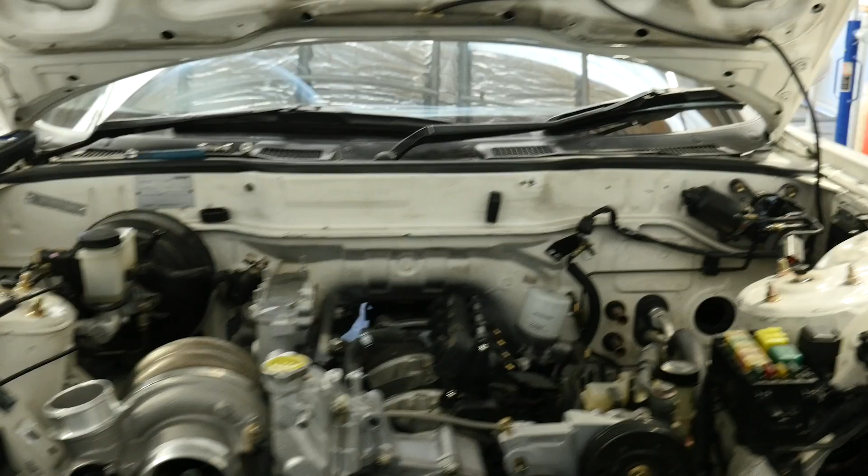Welcome to this webinar. We're going to be looking in a little bit more detail at how a VNT or variable nozzle turbocharger works.

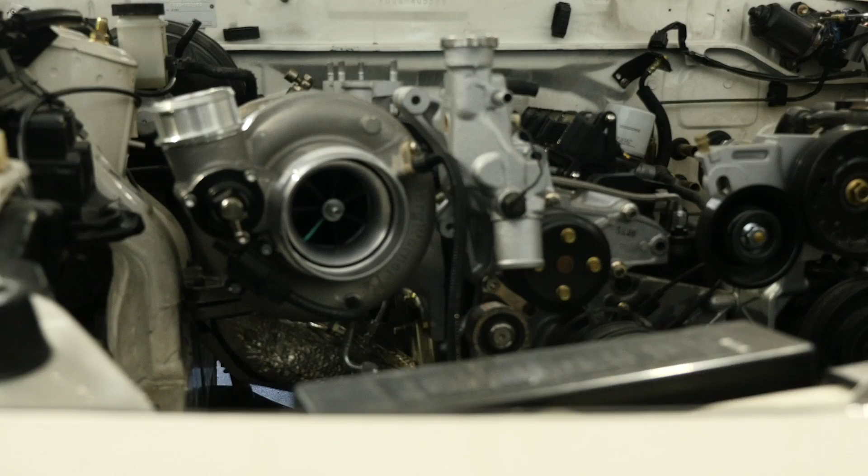Now, while they are more common in the common rail diesel tuning world, they're certainly not exclusive to diesel engines, and it is a technology that you may come across that requires a little bit of an adaptation of the way we'd normally control boost pressure in a turbocharged vehicle.

There are also some knock-on effects for how the VNT turbocharger actually affects airflow through the engine, or in other words, the volumetric efficiency of the engine. And these are some of the topics that we're going to be looking at in this webinar.

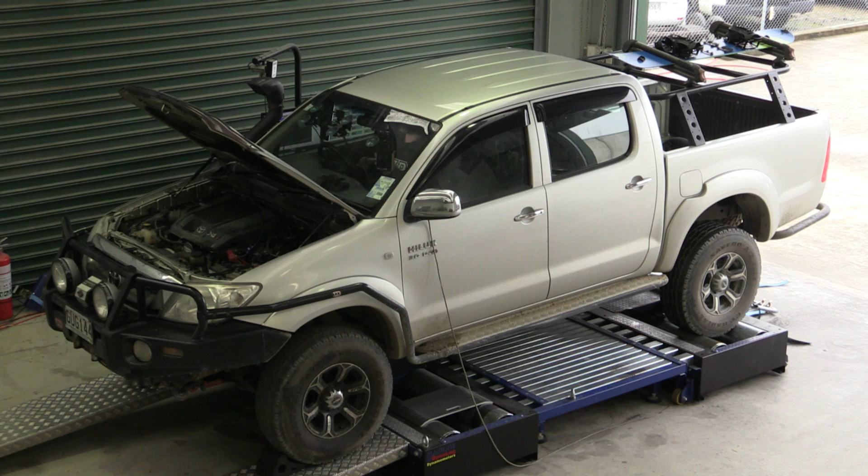For this particular webinar, we are going to be presenting this on a Toyota D4D 1KD turbo diesel engine, and this is going to be running on the MoTeC M1 diesel beta platform. So really the specifics of that platform aren't too important. We're going to go through the aspects that relate to the turbo control, and really that's all we need to know about here. It's not going to really affect us too much that this is on a diesel engine.

So let's start with what is a VNT turbo. As I mentioned, it stands for variable nozzle turbocharger. They are also referred to as variable geometry turbochargers. There's a few different variants of name, but in essence what they are is a turbocharger with a range of little vanes built into the exhaust housing that allows the effective AR of the housing to be altered on the fly while the engine's operating.

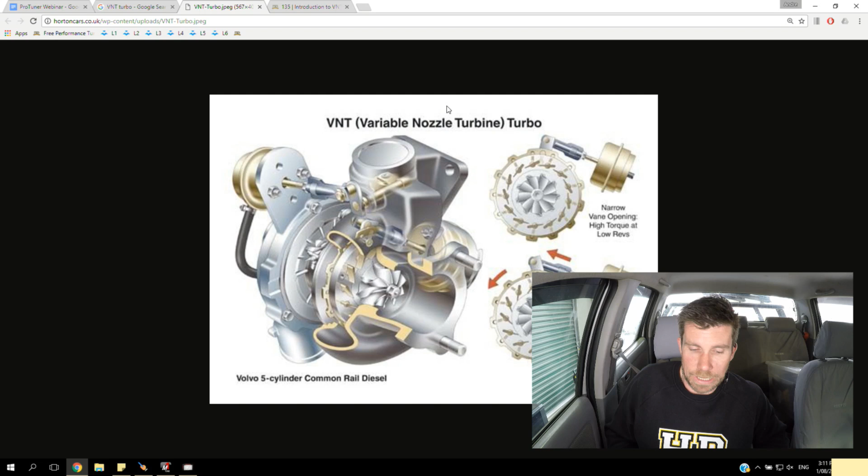We've got a picture here that I've just managed to find from Volvo, so if we jump across to my laptop screen, I'll just give you a bit of a look at how that works. So the part that is specific to the VNT turbocharger is the way the exhaust housing is constructed. The actual turbocharger itself is still for the most part a conventional turbocharger, but what we can see here is these little vanes that rotate in the exhaust housing, and by opening or closing these vanes we can essentially affect the AR of the exhaust housing and supply the turbocharger with differing amounts of exhaust gas energy.

And what this allows us to do is, with the VNT turbocharger, by moving these vanes, we can make the turbocharger act like a small turbocharger with a very tight exhaust housing that's going to provide good low RPM performance, a low boost threshold. But at high RPM we can then open those vanes, which is going to mean that the exhaust back pressure isn't going to become super restrictive.

So the two positions for these vanes are shown in this drawing. At the top here you can see this is the narrow vane opening, so this is what's used for low RPM to provide quick response to our turbocharger. But of course if we were to hold the turbine housing in this position at very high RPM, we're going to end up with a situation where the exhaust back pressure becomes excessive, and that's going to limit performance.

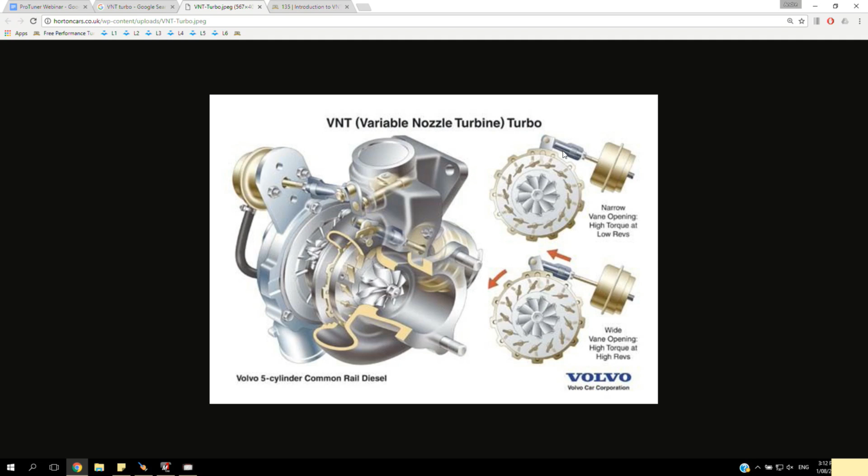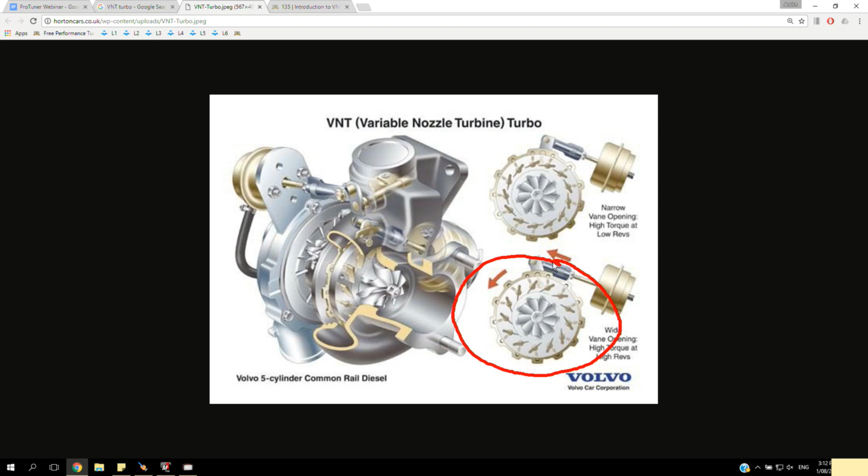So at high RPM, once the turbocharger is spooled, we move the vanes and open them. This becomes less restrictive. This acts a little bit more like a larger AR exhaust housing, and hence we end up controlling our boost pressure, and we also don't end up with excessive back pressure. So with the VNT turbocharger, typically we don't actually need a wastegate. The way we actually control boost pressure is by simply opening or closing the vanes in the exhaust housing of the turbocharger.

So I've shown on that particular picture there from Volvo the vanes in 2 positions, but of course we don't just have 2 positions. The vanes can be varied infinitely between fully open and fully closed, and this gives a lot of control over the airflow to the turbocharger, the exhaust flow to the turbocharger, and hence the response of the turbocharger.

With the VNT control, the VNT system can either be pneumatically or electronically controlled. In the case of our Toyota turbocharger, it uses a servo motor for electronic control of the VNT system, and that also incorporates a position sensor, so there's some feedback there.

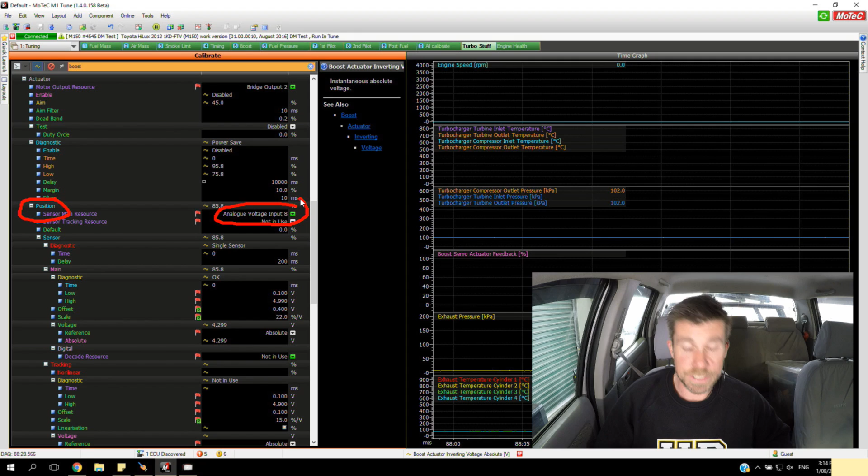Now what we'll do here is just have a quick look in the Motec software and see how that all works. So if we can jump across to my laptop screen, what we've got here is a setup for our boost servo. So essentially there is a position sensor. We'll just scroll down so we can see that. We've got a position sensor set up. At the moment this is coming into analog voltage input 8. So this is a simple 0 to 5 volt sensor that tells the ECU what the position of the VNT vanes are between completely open and completely closed.

Now if we move back up, once we've got that system in place, the M1 ECU uses a linearization. So what it does is it converts a duty cycle between 0 to 100% into the VNT vane position that's used for the actual boost control system. So once it's gone through this linearization, essentially everything works pretty similar to a conventional wastegate solenoid, where the ECU is just supplying a duty cycle to the solenoid between 0 and 100%. So this is how it's controlled in the M1. It converts the duty cycle into a VNT or boost servo position via this linearization.

So just to have a look at this here, we can see that on the axis we have 2 points. We've got 0 and 100%. So these are our boost control duty cycles, and those are being converted there into a percentage of the VNT travel. So with a duty cycle of 100%, you can see we've got a value there of 45%. So this tends to have the VNT system quite closed, and 45% is not as closed as it can go. And this is one area where we do need to be a little bit careful.

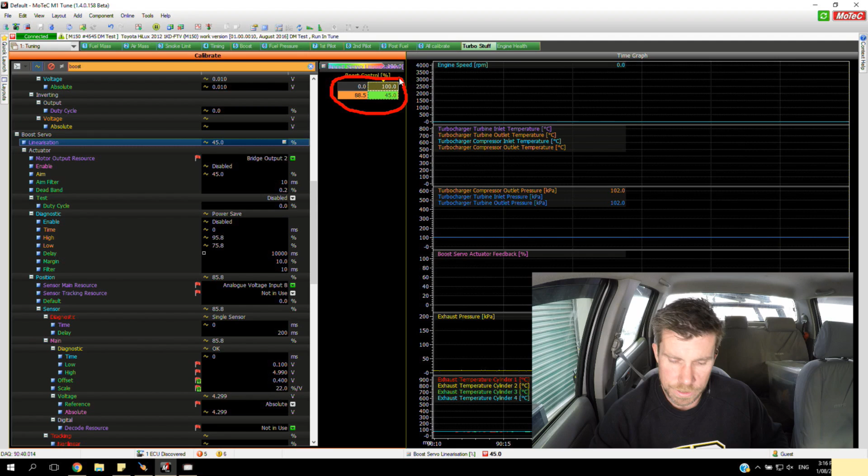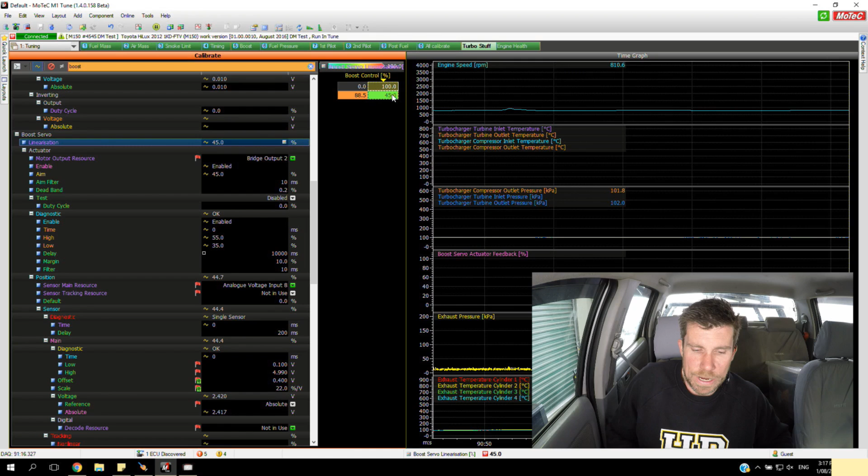What I'm going to do is I'll just start the car, and I just want to show you the effect of this. So at the moment you can see we've got a little yellow pointer, showing that currently our duty cycle being fed out of the boost control subsystem in the M1 is 100%. So at the moment we haven't reached the boost target that we've got at this point. So the ECU, just like you do with a conventional wastegate system, is holding the wastegate completely closed in order to build boost. Obviously I'm only sitting at idle here at the moment, so we can see that that translates to a position of 45%. That's what we've got in our linearization table, and if we look down at our sensor position, we can see that for the most part, while it is moving around a little bit, we are sitting at about 45%.

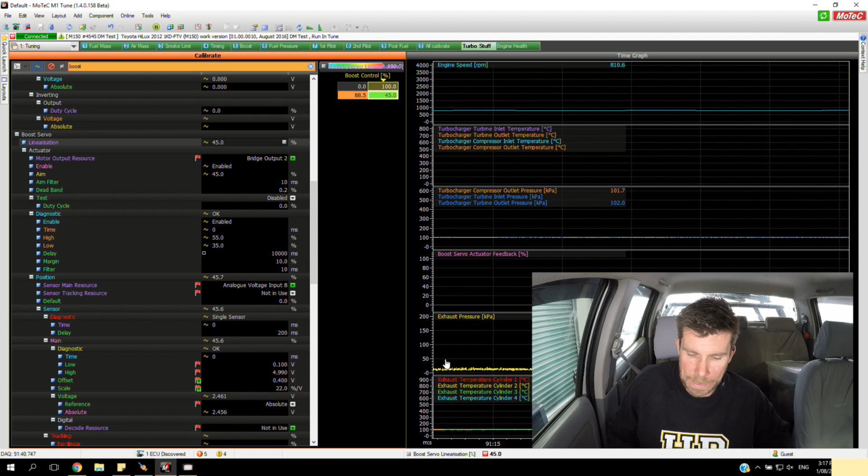Now the important point to note here, this is just a quick demonstration of how much effect this has on the exhaust back pressure in the engine. We have a logged parameter here which is exhaust pressure, and you can see at the moment we're sitting at around about 11 or 12 kPa, just sitting here at idle. What I'm going to do is just drop this down from 45% to 29. So what we've done there is we've just closed the VNT nozzle tighter.

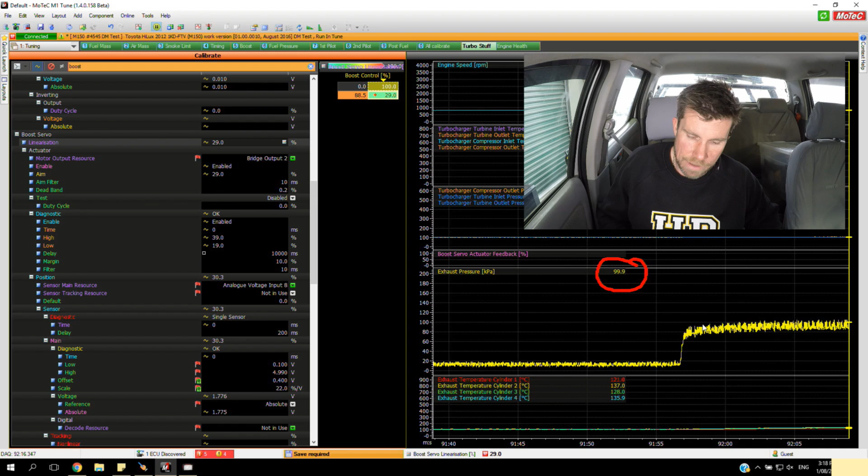Now the effect of that's instantly noticeable. You can see that our exhaust back pressure has jumped up. We're now sitting for the most part somewhere around about 100 kPa, and the point where I closed that VNT nozzle is right here, so we can see that really sharp step in our exhaust back pressure that's corresponded to that VNT position change.

So this is one aspect that is important to keep an eye on here, and this is why we've started by working backwards from Toyota's default values or minimum and maximum values. The reason I say this is while closing our VNT nozzle down tighter like this is going to help our boost response.

What it does is it actually tends to create so much exhaust back pressure that it strangles the engine, and what this is going to do is mean that particularly in cruise situation we're actually strangling the engine, and that's going to be counterproductive for our engine performance and definitely in terms of our engine economy.

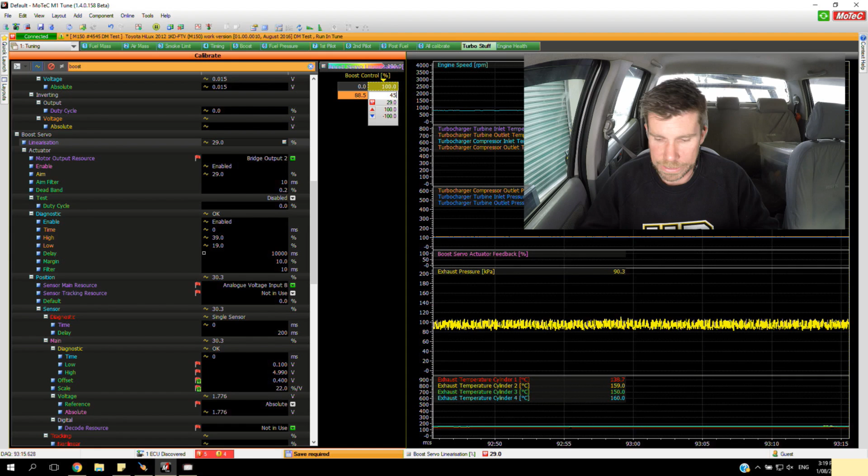So I'll just take this back up to our base value. As you can see, as soon as I do that, I take it to 45%, our exhaust back pressure drops back, and what won't be audible to you is the whole engine note changes. As soon as I go from 45 to 29% there on our VNT position, what we notice is that the engine sounds strangled.

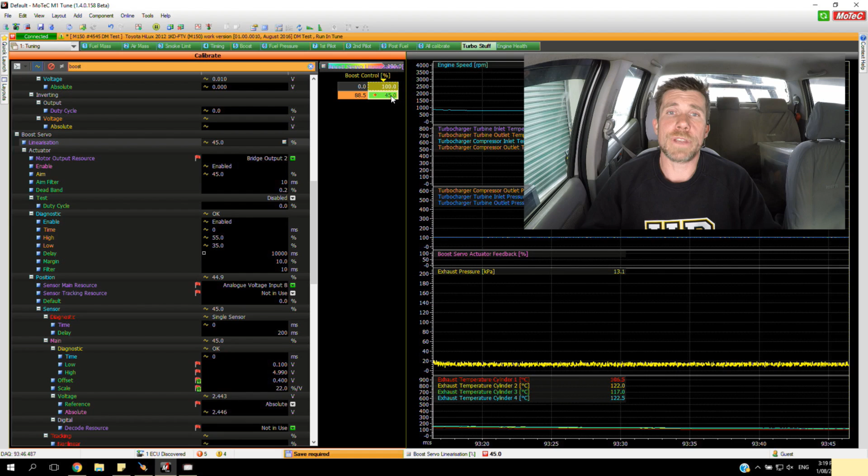It drops its engine note slightly, and we also end up providing more energy to the turbocharger. If we had a turbo speed sensor, we would be able to see that aspect as well, but I can actually hear the turbocharger starts to produce a very slight whistle as well. So this is how the M1 system controls the VNT system.

Okay, so once we have that system set up, once we've got the VNT position sensor set up, in this case because it is electronically controlled, and we've got the servo motor, this is using a bridge output the same way as the M1 drives a drive-by-wire throttle motor. Once we've got all of that set up, then the tuning sort of becomes very similar to what we would use for a conventional pneumatic external wastegate or internal wastegate, and we'll have a look at a demonstration of the tuning process pretty shortly. Now there is a really key point here though to keep in mind.

When we are tuning with a VNT turbocharger, when we change the VNT position, as we've seen there, we've got a really large effect on our exhaust back pressure, and what this tends to do is in turn have a knock-on effect to the engine's volumetric efficiency. So this is one of the reasons why the M1 package that we're using uses mass airflow instead of a conventional volumetric efficiency system that's so common now in aftermarket ECUs.

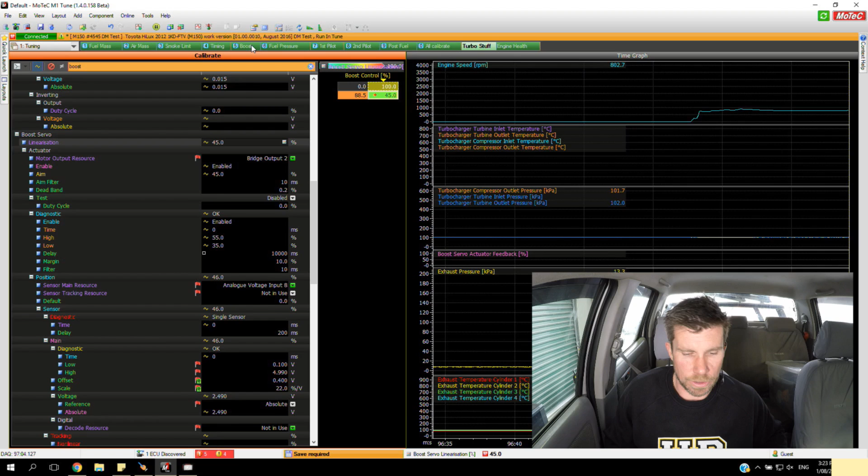Right now we are quite low in our barometric air pressure. We sit at around about 95 to 97 kPa here in Queenstown, so this is just something we need to keep in mind for those who are more used to viewing absolute pressure numbers for your boost pressure. So 120 kPa, somewhere around about 18 odd psi, is our boost target.

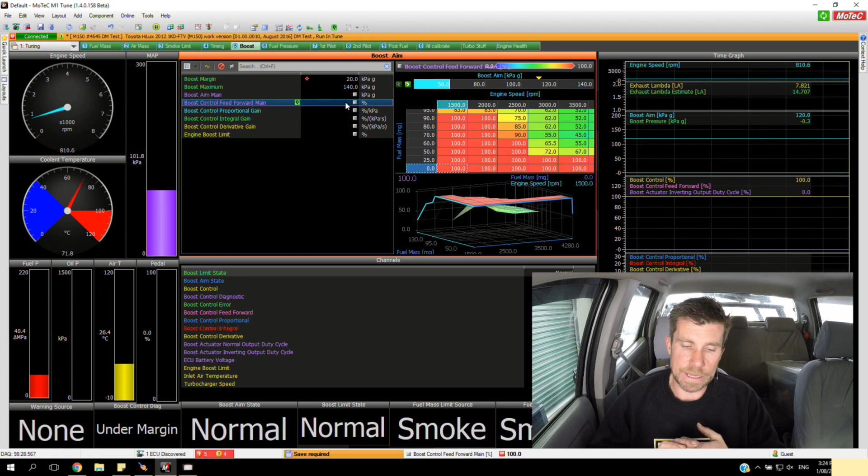The feed forward table is where the ECU is going to take its base values from for the VNT position. So again, this looks on the face of it very similar to a conventional boost control duty cycle map. We've got a 4-dimensional setup here, so we can see we've got an axis of our boost aim, so we can set our VNT nozzle position relative to fuel mass, engine RPM, and also boost target.

For us at the moment, because as I've just looked at, our boost target is 120 kPa everywhere, we can focus solely on the 120 kPa map, and we can ignore for the time being our other boost aim values and just concentrate on this as a single 3-dimensional table. Again, here we have our fuel mass as a load point. I'll just briefly touch on this just so it isn't confusing.

With a diesel engine, the more fuel we add, essentially the more exhaust gas flow is supplied to the turbocharger. So unlike a petrol engine, with a diesel engine, as we vary the amount of fuel that we're supplying to the engine, this can also affect our ultimate boost pressure. So unlike a petrol engine, we've got this other parameter here that's also affecting our tuning. This really isn't too much different though to a petrol engine, where we would use perhaps a load axis of throttle position or something similar. So this just adds one more dimension that we need to consider in a diesel engine.

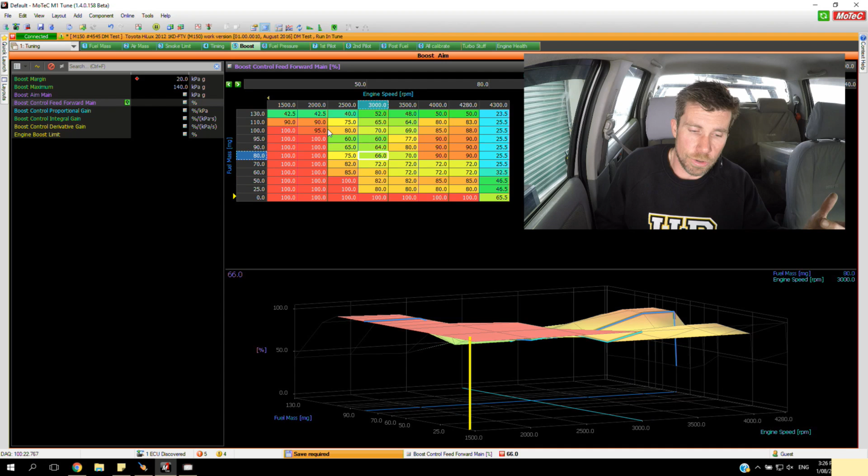Okay, so remember here that what the ECU is doing is taking the value from this particular table, our duty cycle table, that's going to vary between 0 and 100%, and then it's converting that through the linearization table that we just looked at over here into a position for our boost servo, our VNT control servo motor. And the servo motor is achieving that by using a PID control algorithm. It's looking at the target, and then it is looking at the measured position, and it's making adjustments to the servo in order to try and achieve our target.

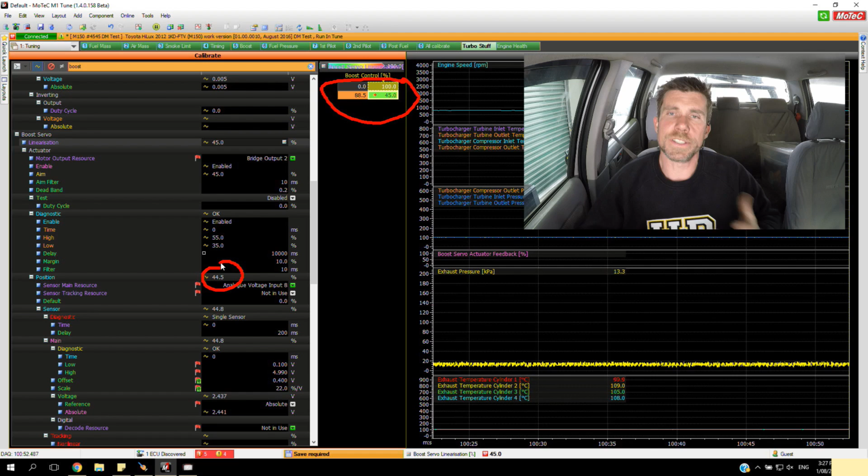So once this is all set up and it's controlling nicely, we can really kind of forget about that, and we're going to focus all our efforts here in our boost control map and our feed forward map. So what we'll do now is we'll just get our car up and running on the dyno. Let's just jump across to the dyno. We'll watch the dyno during this ramp run. Remember, we've got a target of 120 kPa. I've put a reference line here on the dyno at 18 psi, just so we can see how close we are getting to that. We'll just get up and running in 4th gear.

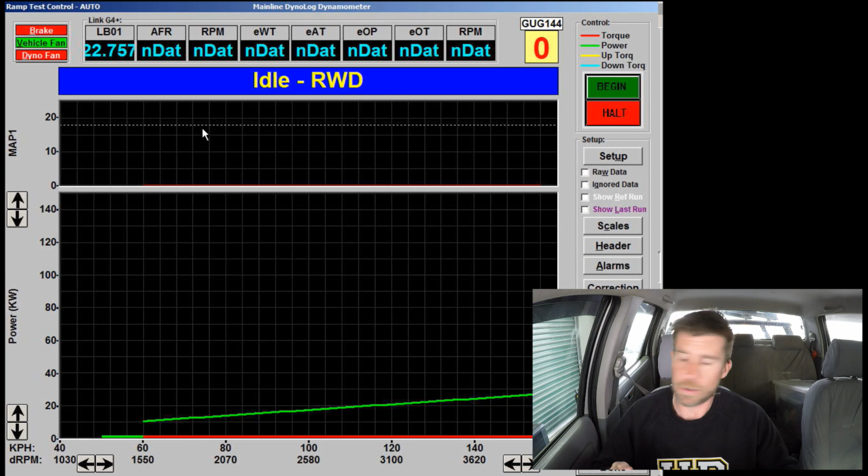We'll do the run on the dyno. We'll have a look at the data on the dyno, and then we'll also be recording this in our time graph here on the M1 ECU, and we'll have a look at how that works once we've looked at the actual live run on the dyno. Alright, I'll just let everything settle for a few seconds, let our boost just come up to a control point, just build a little bit of exhaust temperature so that we get some reasonably consistent results. Let's get our run underway now.

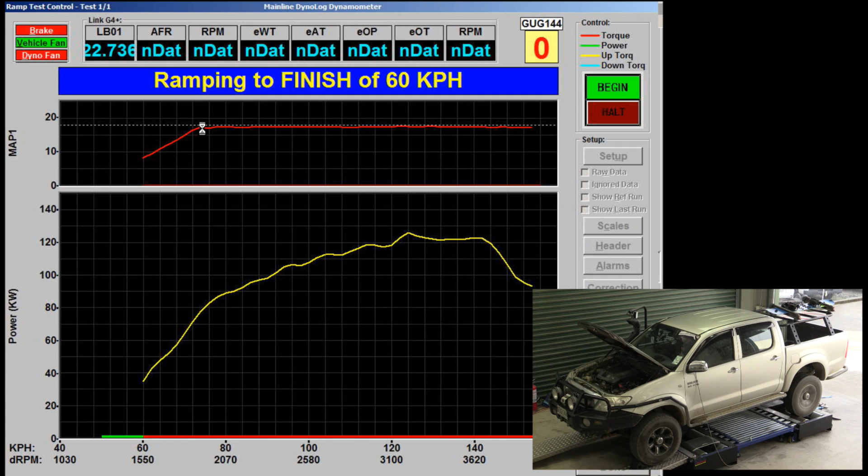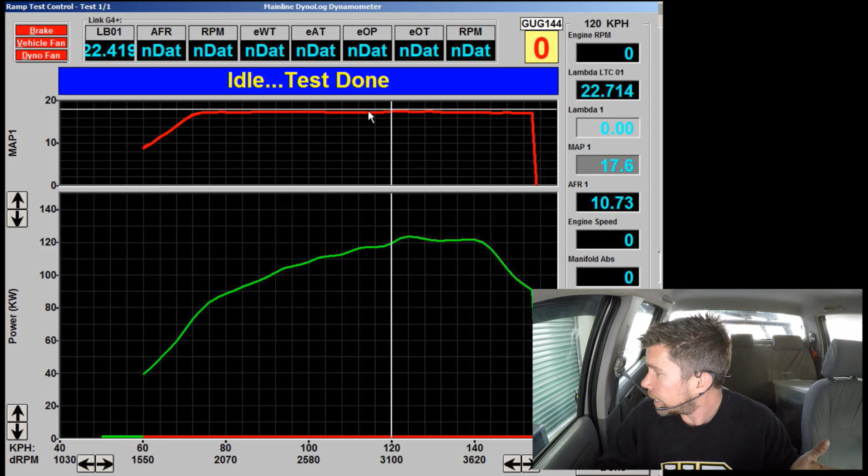Okay, so we can see there we've ended up with 123.6 kilowatts, 165.8 horsepower at the rear wheels. Really the power aspect wasn't too critical to this demonstration. We're really looking at our boost control more than anything. And we can see there we've got a lovely flat boost line pretty close to our target. Let's just actually look at the boost. Pretty close to our target there at 18 PSI. Let's just jump back across to our laptop screen and we'll have a look at exactly what happened during that run. I'll just full screen our time graph here.

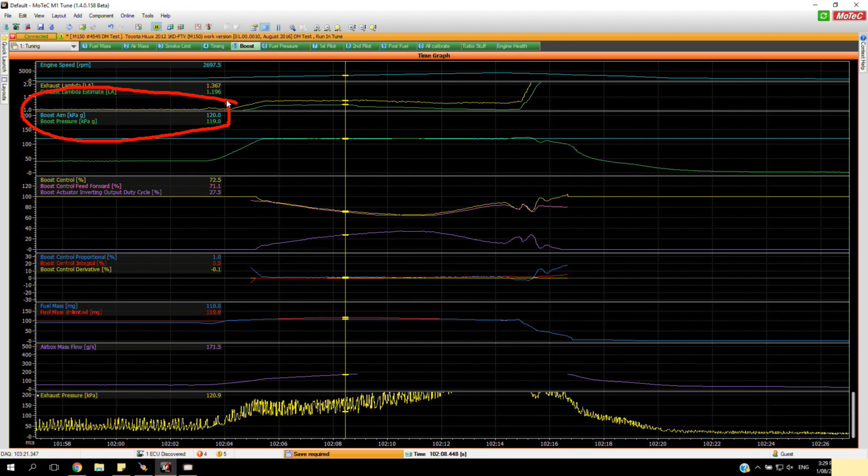So the first place to look here is our boost aim versus our boost pressure. The boost aim is simply the value coming from our boost aim table. You'll remember that was 120 kPa. The green line is our measured boost pressure in gauge value. So we can see that we've come up and we've made full boost a little bit below 2000 RPM. And for the most part here we are within probably 1.5 or 2 kPa of our target.

What we can see also though is what the boost control system is actually doing here. I'll just get rid of that channel that we're not really that interested in. We can see what our boost control system is doing, and this is how we go about fine-tuning the feed forward table or our boost control table.

the VNT turbocharger nozzle. And what we want to do is have a look at the actual final value that's being sent to our boost control system, and that's our yellow line, which we can see here. So the yellow line is the actual final value that's being sent to the boost servo control system. This takes into account the PID control setup of the boost control system. So anytime the boost isn't quite matching our desired target, the M1 ECU will make corrections to the final duty cycle being delivered in order to try and drive the boost towards that target.

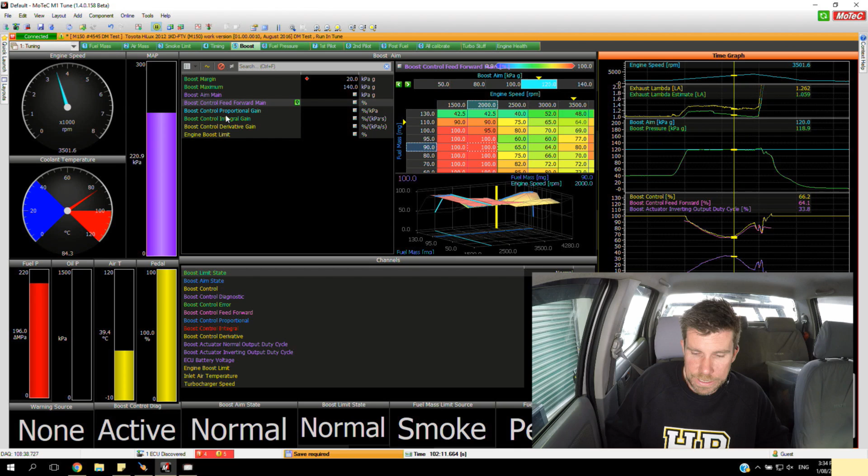I'll just close down this time graph and we'll bring up our feed forward table a little bit larger. What we can do here, if we are active at a particular point in the time graph, we can press spacebar. That's going to take us to the exact point in the table that was being accessed during that run. So the exact point that was being accessed at that point in the time graph.

So we can see we're sitting at 3,500 RPM, which you already knew. Also, the fuel mass at that point is 110 milligrams. We can see we have a value there of 64%, which we already know from our time graph. Remember, we had 66% being sent out to the boost control system. We're still a little bit low, so what we can do there is just preempt that by taking it up to 67%. So this becomes an iterative process.

We can now go back to our time graph. I'll just open it up full screen again, and the next point that we had in our table was at 4,000 RPM. So I'm just going to move through to 4,000 RPM here. And we can see at this point we're now adding around about 4% to our feed forward value. We're up to 86.8%, but again we can see that we're around about 2.5 kPa lower than our target.

So what we can do is again go back to our feed forward table. We can go to that particular point in our feed forward table, and this time, well, you may not be able to see, it's a little bit hard to make out, but we're actually interpolating slightly there between two rows in that table. We're interpolating between 100 and 110 milligrams of fuel.

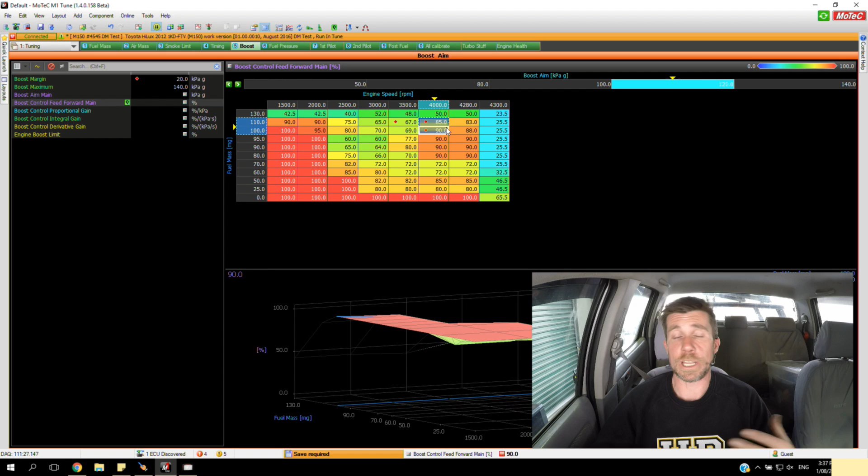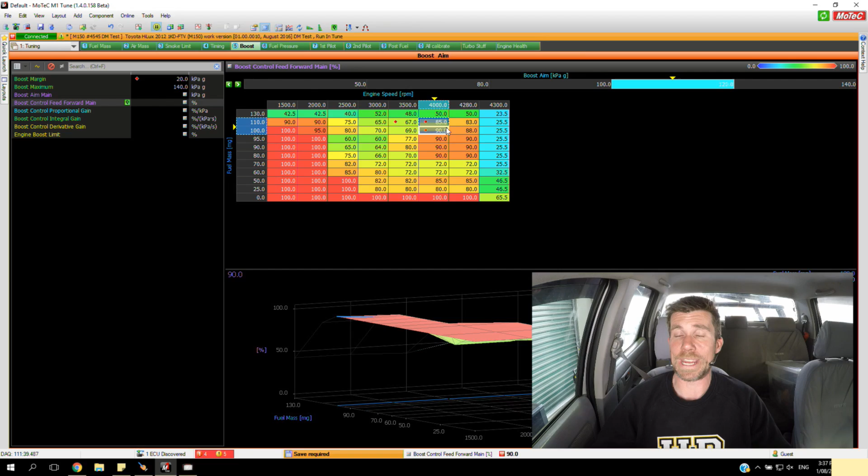The best place to start is to actually disable the closed loop control system. We can do that by zeroing out our P, our I, and our derivative D gains. That essentially makes the ECU act like an open loop control system. It's going to ignore any error, and then we can get our boost close to our target by just then tuning our feed forward table, and then we can re-enable our closed loop control.

What we'll do is I'll just do one more run now with those changes made, and we'll see how that affects our boost control.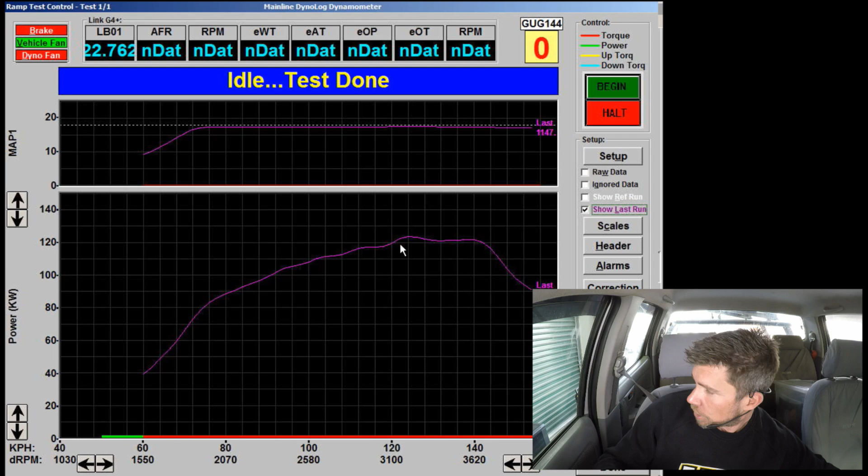Alright, we'll just go through to full throttle and just allow the engine to settle for a few seconds. And once we've got a stable boost pressure, built some exhaust temperature, we'll get our run underway. Alright, let's see what we get this time.

Okay, so essentially exactly the same power there, which is no big surprise. We're only really chasing differences of a couple of kPa. We actually ended up with a slightly slower boost response there, probably just due to exhaust temperature differences between those two runs.

One of the things when we are tuning any turbocharged vehicle, whether it's a conventional wastegate system or whether we've got a VNT turbocharger, the boost response and boost threshold of the turbocharger is very dependent on exhaust temperature. So if we do a run when everything's stone cold, what we're going to find is that the boost threshold, the point where we actually reach full boost, tends to be quite a lot later in the rev range than if we do a couple of runs back to back. We've got everything up to operating temperature. We'll find that our turbocharger comes on boost much quicker.

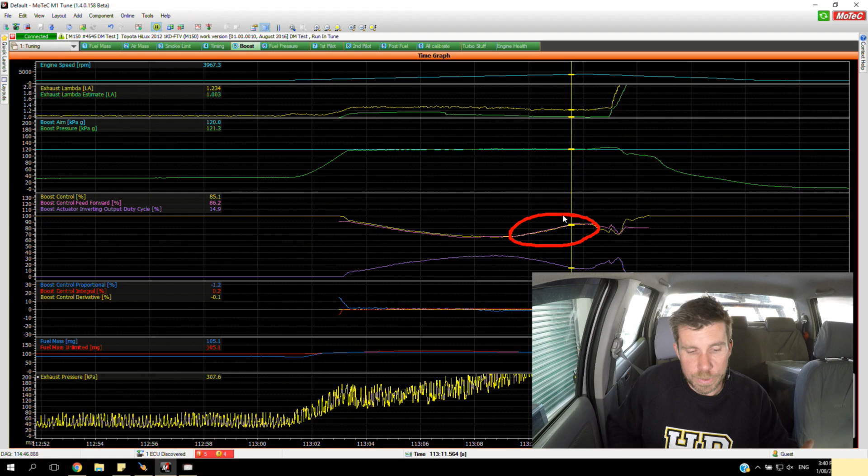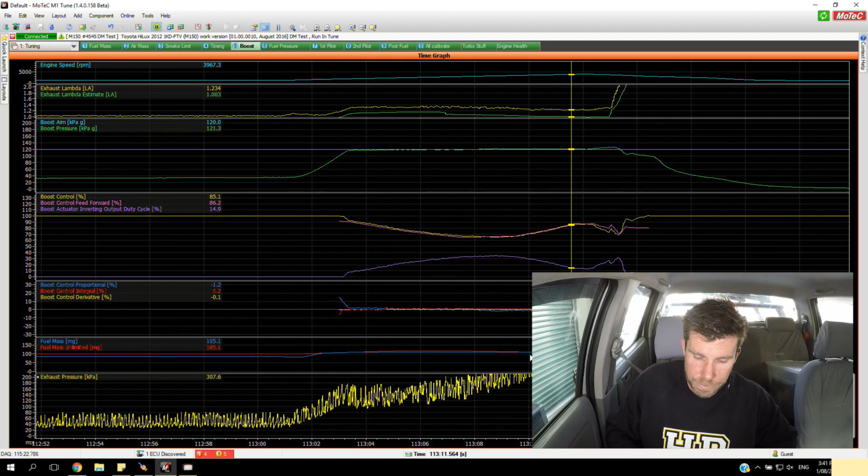This time we can see, if we look at our boost control percentage versus our feed forward table, they're all within around about 1%. So this is again indicative that our feed forward table, our base duty cycle table, is pretty well set up and optimal. And regardless again whether we're using a conventional wastegate or a VNT turbocharger, the closer that feed forward table is, the less work our closed loop control system is going to need to do, and the less our closed loop control system needs to do to correct error, the better our overall boost control is going to be.

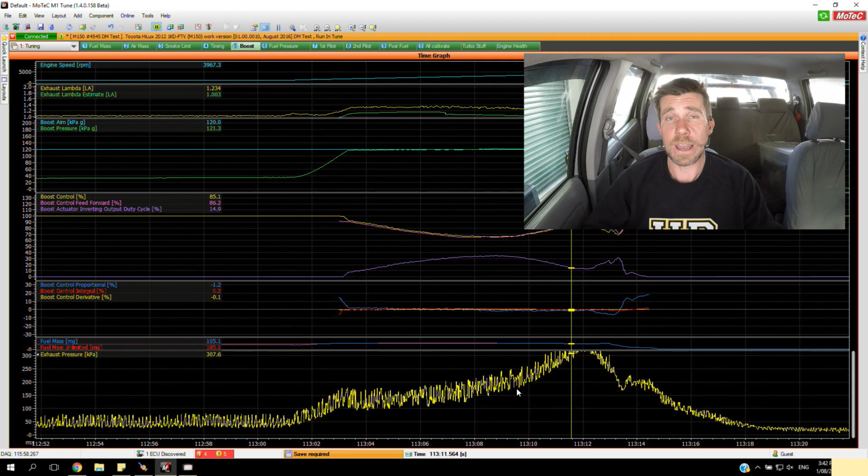And we'll just come down as well and have a look here. I'll just change our scaling here so we can see what our exhaust pressure is doing. We'll take that up to 300 kPa. Now you need to appreciate here that we are dealing with an undamped exhaust manifold pressure sensor, so this is why we've got a lot of noise in the data here from our exhaust pressure. I can't filter that within the time graph here on the M1 ECU live. We could filter that post the data being collected in MoTeC's i2 software, but I can't do that in real time.

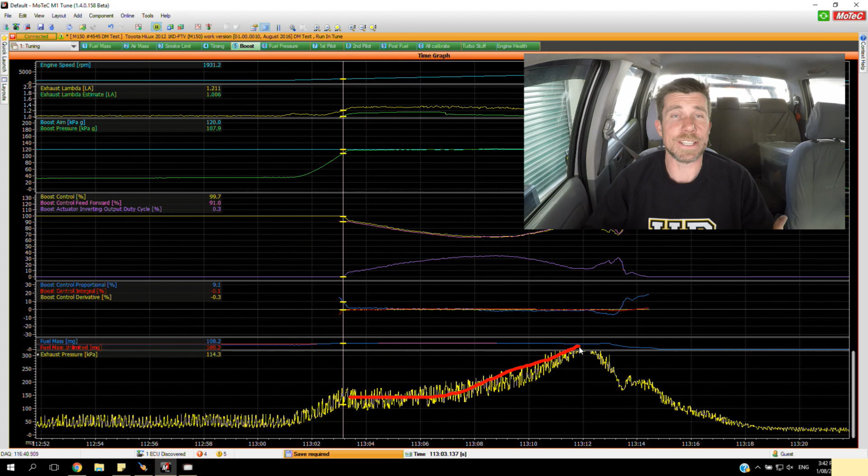However, you can mentally also smooth this, and essentially what we see is the exhaust pressure is still climbing quite sharply as we get to high RPM, which is to be expected. Still, we have a relatively small turbocharger for the engine, and of course diesel engines are really not designed to rev particularly high. They are designed for low RPM torque, so even with the VNT turbocharger, the design and sizing of that VNT turbocharger is still skewed towards providing good low RPM performance.

The important thing to note here though is in comparison to a fixed geometry turbocharger, we have got the ability here to make our 120 kPa of boost at a little under 2000 RPM, yet we can still make good power all the way through to 4000, 4200 RPM, which with a fixed geometry turbocharger we would need to be compromising either our boost threshold, the RPM where we can reach full boost, or alternatively we would be really strangling the high RPM performance much more than we are right now.

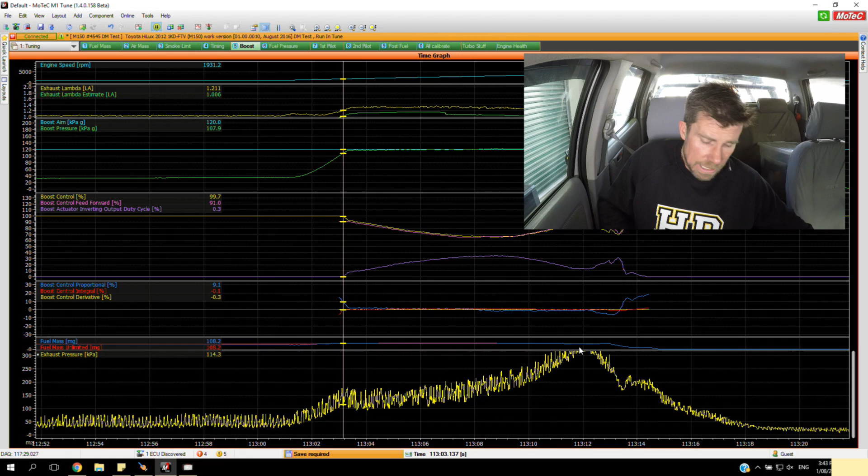First question from Tyler, who's asked, will these types of turbos along with the setup and process work well with spark ignition engines as well? Yes, they do. Probably a little bit rarer. I know for just one example that Porsche are using VNT turbochargers on some of their engines. So it isn't an exclusive technology solely to common rail diesel engines. Definitely we see them very, very common in the diesel world, less so in the petrol world, but certainly it's not a technology that is exclusive to diesel tuning.